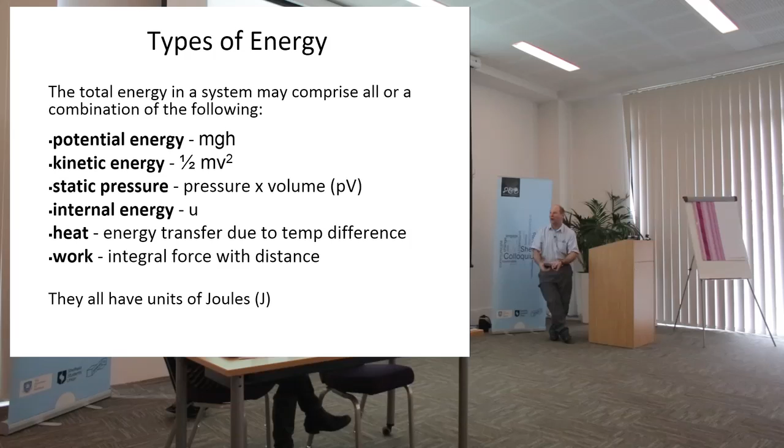But what we get is lots of different types of energy. Has this got a pointer on it? Oh, great. So we get potential energy, energy due to things being lifted up, kinetic energy, the energy associated with something moving. We get pressures around us - to pressurize something requires energy. Internal energy is based on the heat of something, how hot it is. And then we get these other two, which are very necessary for what's going to follow.

Heat is energy transfer due to a temperature difference. So if you've got a hot thing and a colder thing, the energy moves from the hot thing to the colder thing, and that's the heat transfer. You always get heat transfer if you've got a temperature difference between two things. Work is force with distance. So if you've got movement, like I'm doing now, you're doing work. If something's moving, there's work associated with it. Interestingly, electricity, pointing to the light, is also a form of work because you can convert that directly into movement using a motor. So heat is energy transfer due to a temperature difference. Work is energy transfer due to movement.

Remember those. Actually, you don't have to because I've got them written down here. Don't worry too much. Energy transfer is associated with the force acting through a distance, and we've got some units associated with that. Remember, heat, temperature, work, movement.

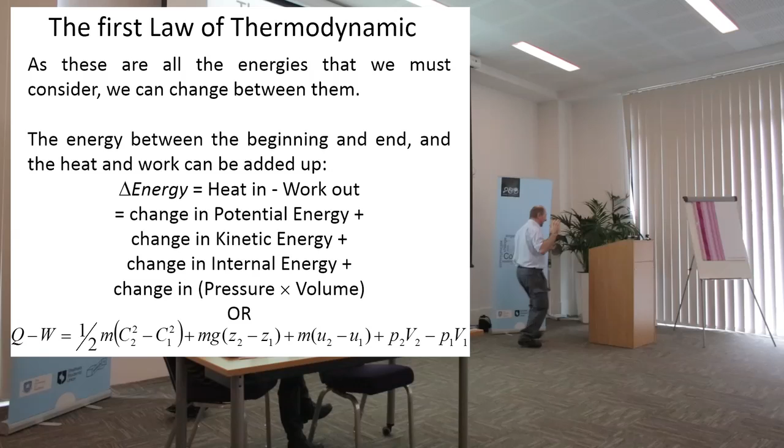We then get the first law of thermodynamics. There are lots of different ways of writing it down. These come from my first year notes. What we can see is that all of the energy terms I gave you before, heat, work, potential energy, kinetic energy, internal energy, pressure times volume, they are all interchangeable. So the first law of thermodynamics tells us that all of these different forms of energy are interchangeable.

So if we heat something up, we might increase the internal energy. They just all balance. There are lots of different ways of looking at that. I was going to play this from YouTube. I know some of you have seen it before.

Okay, that's brilliant. So what we see there, and I'm not showing it for prurient purposes, is actually all about energy transfer, because this brings up lots and lots of interesting things. Are we in pause mode? Probably. So what we get here, bet you didn't think you were going to get some film critique here.

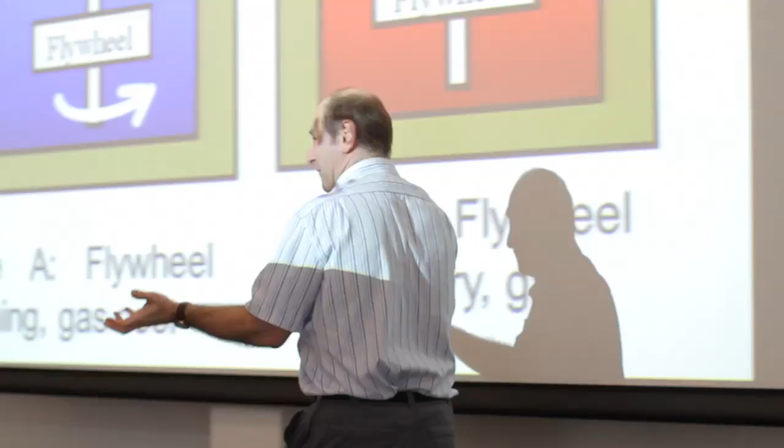So what we find out is that this is due to what we call the second law of thermodynamics. The first law tells us energy can neither be created nor destroyed. The second law tells us what order things happen in.

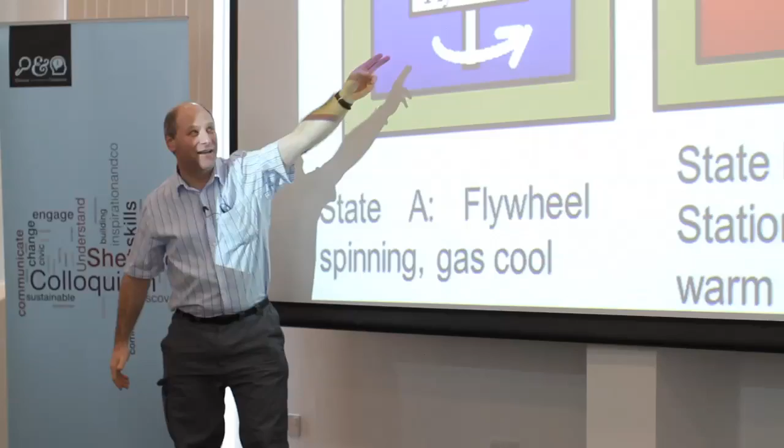A good example of this, once again from my first year notes, is if we have a flywheel spinning in an insulated box, the flywheel possesses kinetic energy. If we leave that for a long time, the flywheel will slow down. It'll convert its kinetic energy into warming the box up. So what we find naturally is that the spinning wheel slows down, that energy goes into warming up the box, and that's the natural way of things happening.

So what happens is the natural way of things is for movement to turn into heat. We see that in exactly the same way from that guy and his cycle riding experience. I have a helmet, so I'm all right. So there's naturally a way for things to go easily. Don't worry, this is going somewhere. So if we look at these, which of these is easier to do?

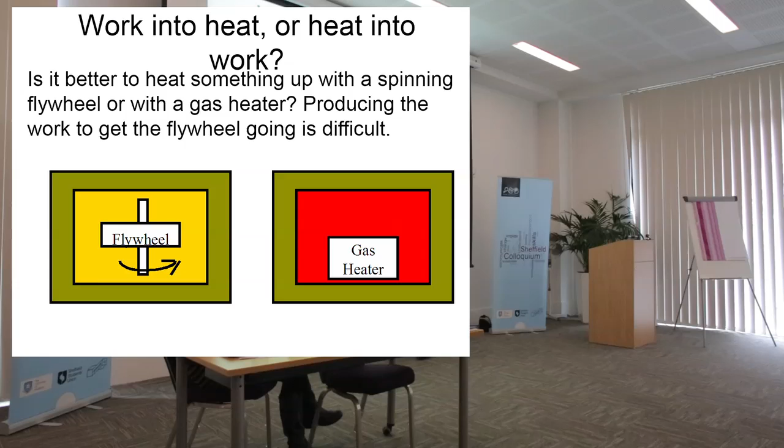To heat our box up, by spinning up a flywheel to speed and letting it slow down, or by putting a gas heater in there? I won't even trouble you to ask for an answer. This is clearly a lot easier, because we'd have to get the flywheel moving, and to actually get things moving like that is difficult. It's hard work, as they say.

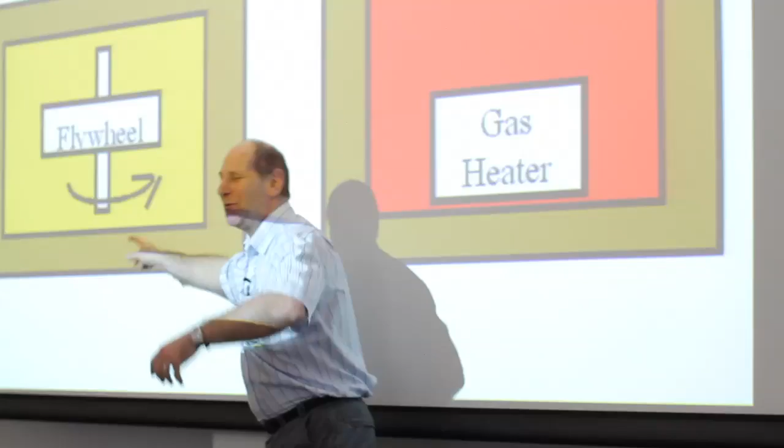So typically how we would get that flywheel moving is we attach it to an electric motor. The electric motor's got to be attached to the electricity. The electricity comes from a power station. We burn some gas in the power station.

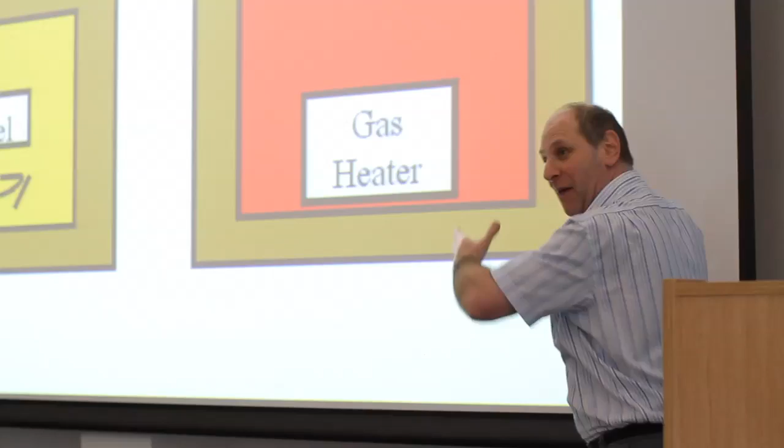Really indirect. So what we find here as well, which comes out of the second law of thermodynamics, is that movement, that work, that potential, is a much more valuable thing than heat. When we looked at that guy coming down on the slope, the amount of energy possessed in all of those pictures was roughly the same. But what happened was it went from the high quality energy at the top to the low quality energy of him giving up his energy at the bottom and dissipating into the world, which is why we can't go easily from here to here. We need big power stations to do them.

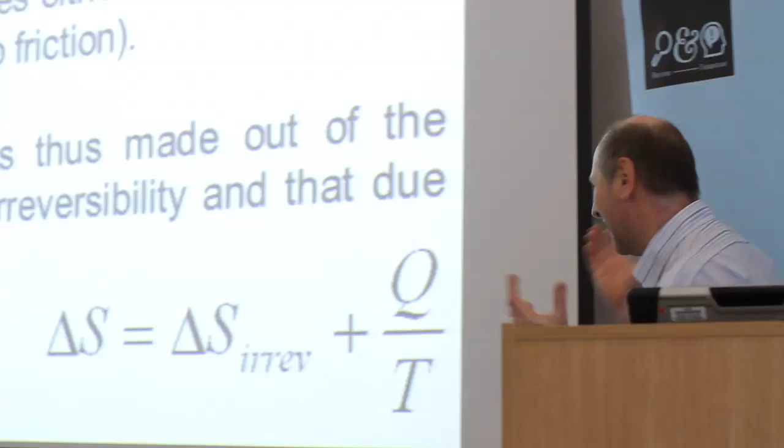I have to put some equations in because otherwise I get fired.

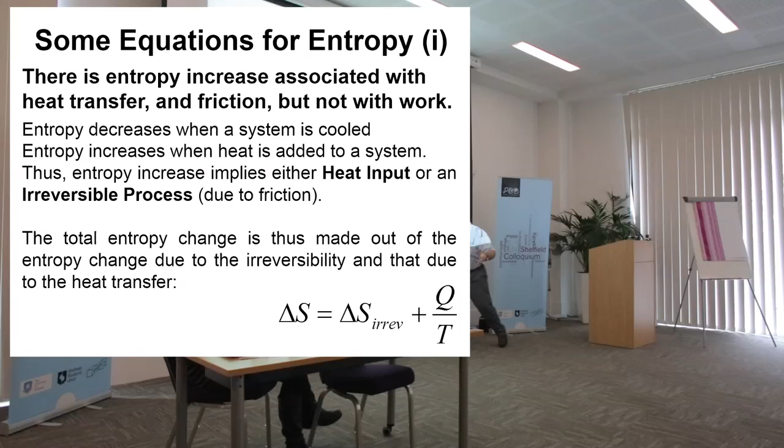Here is one of the two equations for entropy that we've got. This basically tells us that ΔS — S is the symbol for entropy — is equal to something due to the irreversibility, due to friction and things in the system, plus a bit associated with heat transfer, Q.

So what comes out of doing this in further mathematics, which I won't do but I'll show you the results of, is to say that things have a natural way of going. Because of these equations, we're able to say mathematically and physically which way things will go, whether processes are actually viable, whether they can happen, and also how good they are. This will come into what we do later.

Are there any physicists in the house? One? Good, have you come across that? Good, excellent. This is another way of describing the same thing.

There's another way. We've still got S there, entropy. This is the way that Boltzmann defined it. He was so proud of it that he actually got this written on his gravestone. What's entropy? Oh, that's what I'm going to do now. Okay, if you wait a second.

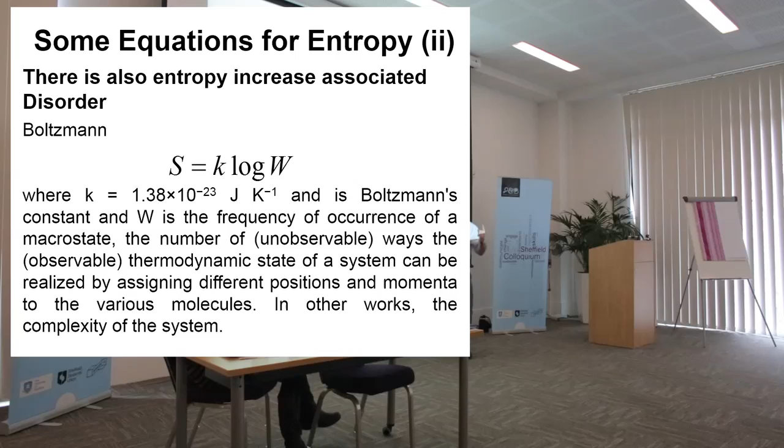Sorry, if you don't understand when I finish this slide, put your hand up again. Good. So what entropy is, in this case, is S equals k, which is a constant, times log W, and W is the number of ways that the system he's looking at can be defined, the number of different states it can be in statistical mechanics.

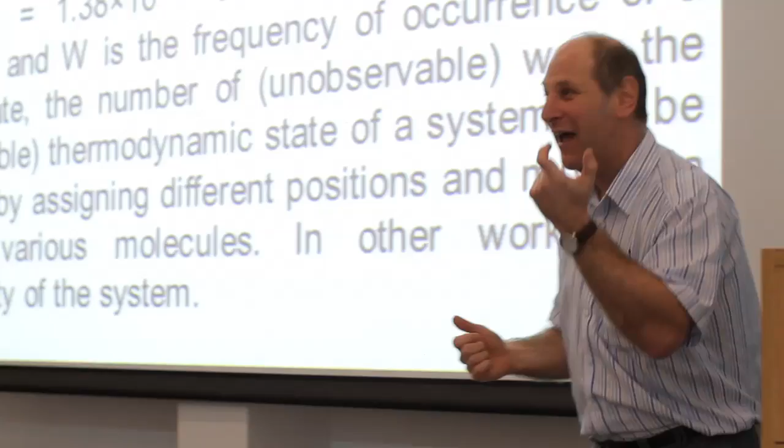And what entropy actually is — well, lots of different ways. That's a really bad question to ask, I could spend about the next 40 hours on it, or somebody could. It's disorder, the amount of disorder in a system. If we think of a pack of playing cards, there's an ordered form, maybe ace to king in the four suits. If we throw that up in the air and gather it together, it'll come down in a disordered state. So if we want to put it back into that ordered state, we have to go through and put work in to sort it out.

Same as my daughter's room. If ever I want to find one of my jumpers, and they're not a very good collection, I look on my daughter's floor, and that's where they are. She's converted my nice, neat jumper drawer into a disordered mess in her room, because the natural order of things is to become disordered.

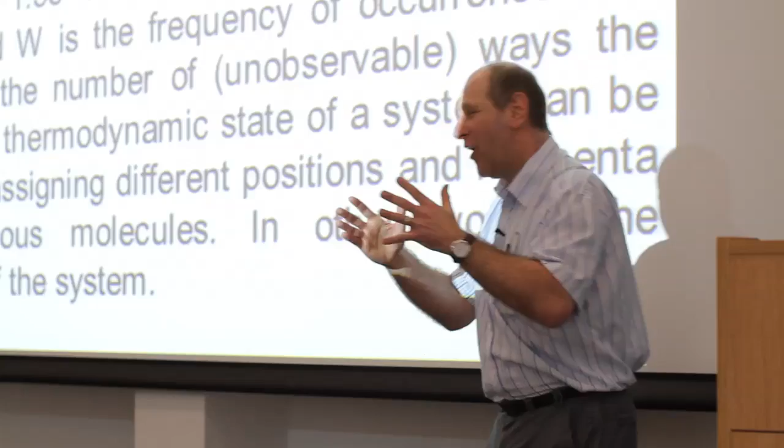So we move from what was at the Big Bang, a highly compressed system of everything where we knew exactly where it is, where entropy and disorder, S, was zero, into what we're getting at the moment, things becoming more and more disordered, further apart, less defined, and stuff like that. So the whole idea of entropy is a very complicated one because it brings in so many things.

You can also, using this same equation, define disorder in information and things like that. Actually moving ones and zeros from one form to another increases the disorder in the world. It's got lots of different possibilities, which is why there are these different forms of it. But if we think about it in terms of disorder — something being lost, because energy can't be lost when we move from one form to another, what can be lost is the high quality of the energy. So the really high quality of the energy, like at the Big Bang when it was all a little thing about that size, was very high. As it gets spread out, it gets dispersed more and more.

Because we can put numbers to it, we can define which way things go forward and which way they go backwards. I know it's not a magnificent description, but it's really complicated. Things get naturally more disordered, and we have to put in effort to reorder them. That's this form of it. When we get on to the playing cards, whatever order they come up in could be the order you wanted them to come up in. It's like the lottery. So that's what our different states, log W, refers to there - the different ways that things can be reordered. And we have defined one of them as being the correct state.

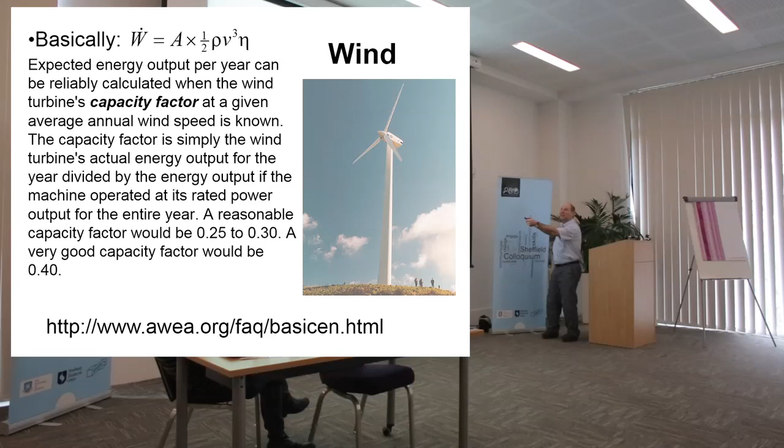I've got an equation there because, once again, I feel I need to put some equations in. W dot's the work term there. That's the area of the wind turbine, swept area, density of air, and that V there, cubed, is the velocity of the wind coming towards it. So it's got a V cubed term on there. So if we double the speed of the wind coming towards it, the power output goes up, roughly speaking, by a factor of 8. So if you put these in a place with a big wind, you get a lot more power out than if you put them in a place with slightly less wind. So nominally a really good idea.

Let's see what it means. I like this, my favourite politician at the moment - no, he's not. So when he first moved into power, David Cameron said he was going to stick one of these up on his house. Does anyone remember that? Probably not, you were too young. It's a B&Q Windsave wind turbine system, 1,500 quid to you.

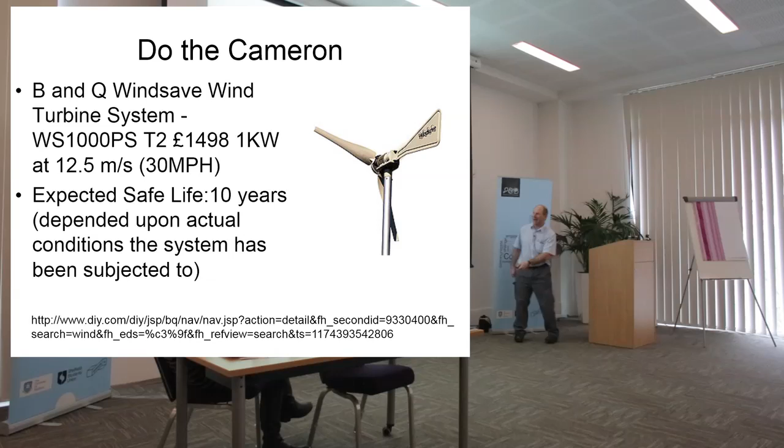Meant to give a kilowatt at 12.5 metres per second - that's 30 miles an hour. It's unlikely your roof will stand up in that. So that's the first thing - complete over-description of how good it is. Expected safe life, 10 years. First of all, it'll knock his house apart. Secondly, financial benefits of these things.

It's on a slightly different one, but that's it. This guy wrote about it - it wouldn't pay for itself in the 56 years that they said it was going to. It would take several millennia to pay itself back. So you could buy one of these things with an expected life of 10 years, which takes several millennia to pay itself back. So someone hasn't done the calculations.

Actually, the Windsave ones that David Cameron was looking at buying - if you put one up in a town, as opposed to in open countryside, the electronics to run the converters use more energy in a year than the wind turbine produced. So your very best trick with one of those to save the planet was to unplug it.

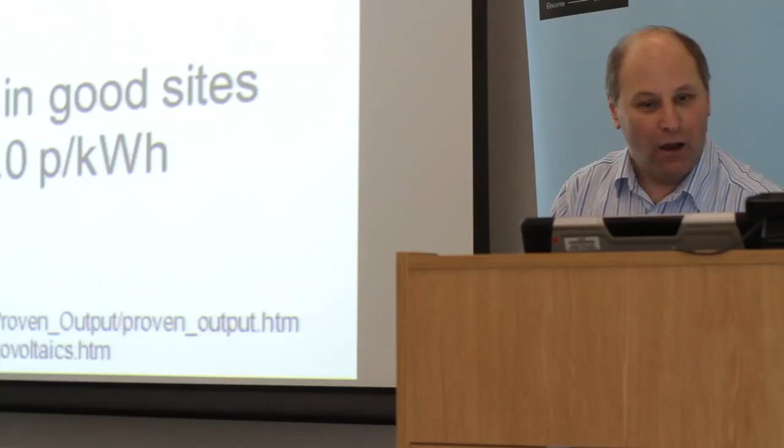So once again, that was sized at 12.5 metres a second, which is right off my scale here. This is a 9 kilowatt proven, a 6 kilowatt Proven - this is a bigger wind turbine. Those are 1 kilowatt; this is about 6. It's a much better thing. As the scale goes up, the value gets much, much better. Those huge ones, like I showed at the beginning, they're really pretty good.

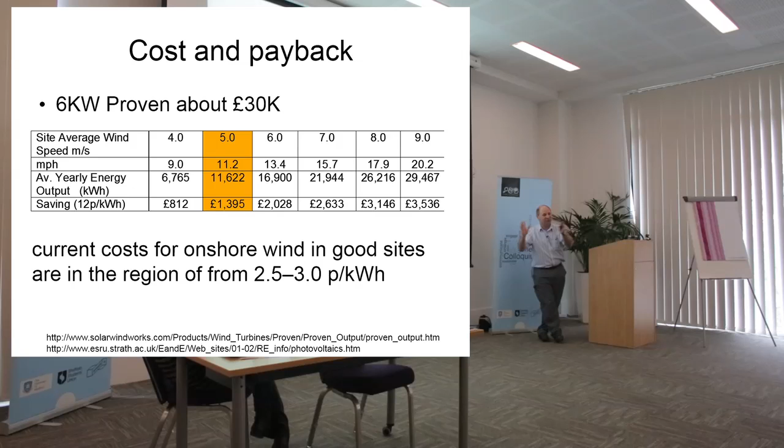Sometime over the summer, 10% of Britain's energy resources were produced from renewable purposes, but very little of them came from wind. The thing we can see is that you get a payback period of maybe, with typical wind speeds of about 5 metres per second, about 25 years. So that's about the smallest size that's worth putting up. Notice 12.5 metres per second doesn't even occur on my notes there.

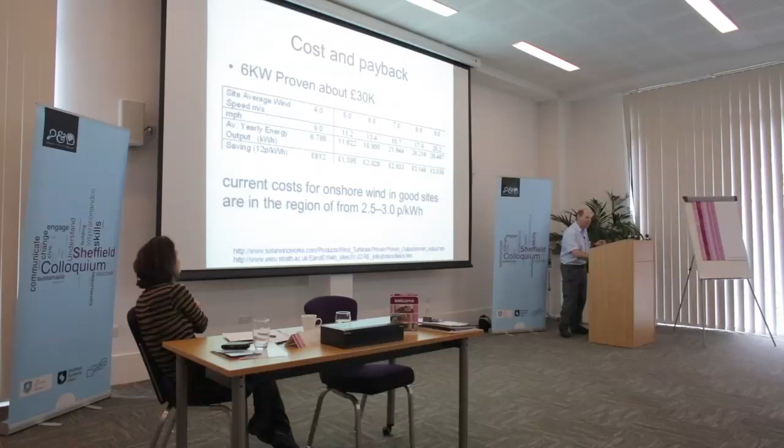So once again, think about what you're doing. Look at the numbers, decide what's going on. Don't just think that a wind turbine's a good thing to put up and therefore you want to do it. You've got to look at where you're putting them up, what the size of them is, what the efficiency is, what the upkeep is, what the utilization factor is, and all these different things for putting them up. You mustn't just think, I want one of those, I'm going to get one, it's good for me, it's good for the planet. The only person that was good for was B&Q, and not even that in the long run. So there we are - payback period about 25 years.

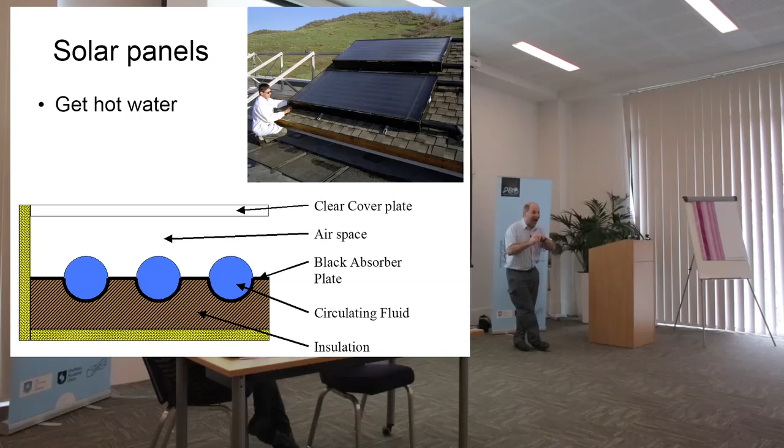As a Guardian reader, hence my thoughts on David Cameron, there was an article on Saturday saying there was an Australian study which found people started feeling ill when wind turbines were put up in their area. The reason they felt ill is because people told them they would be feeling ill. So some of the perception of these things is actually what people are being told to believe.

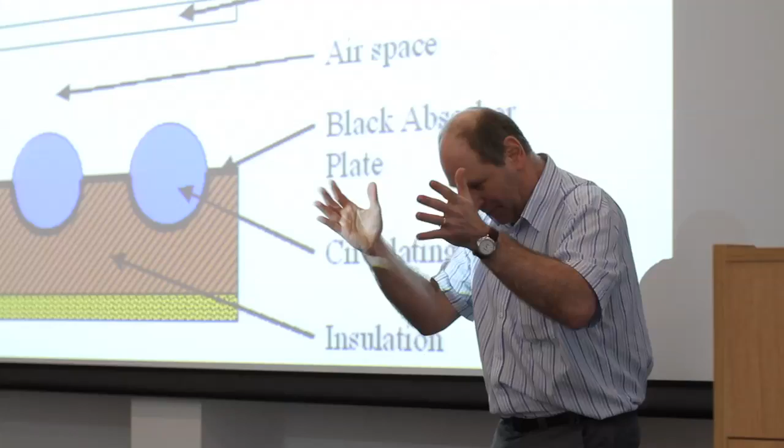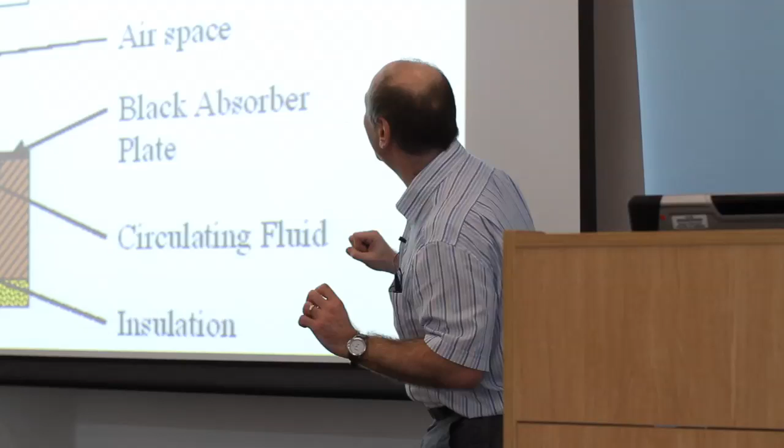There was another thing on the BBC website about what the papers said on Sunday morning, and a piece from the Daily Mail saying global warming is always wrong. This is one of the things the Daily Mail disapproves of, so they find all the information they can and have it corroborated by great luminaries of the renewable energy and climate change world, like Lord Lawson. They've actually built a complete little industry around it.

Solar panels should be a really good idea, and I do think they're a very good idea since I've got a PhD student doing a project on them at the moment. But they may not be a good idea this far north in this country. I've also got a large contract from a company who builds them, so I should be careful what I say here. So solar panels, not to be confused with solar PV, produce hot water.

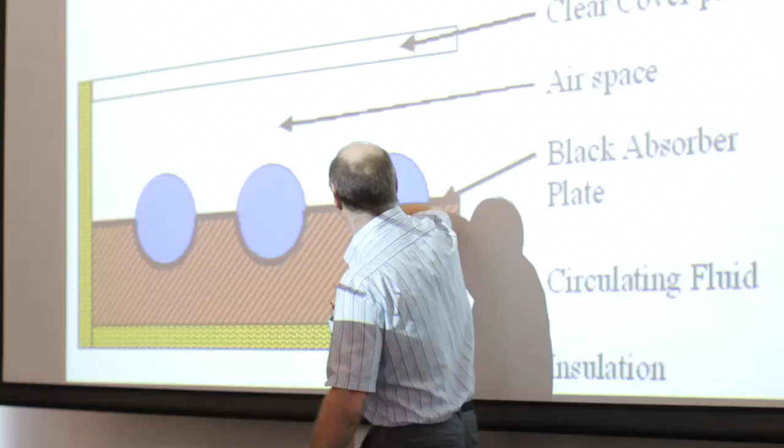Yeah, hot water. The sun comes through, hits the black plate, heats up the area between the cover plate and the other bit. That's hot, so the water circulating around heats up and takes the heat away. Nice and simple, very few moving parts, and you can build them very cheaply.

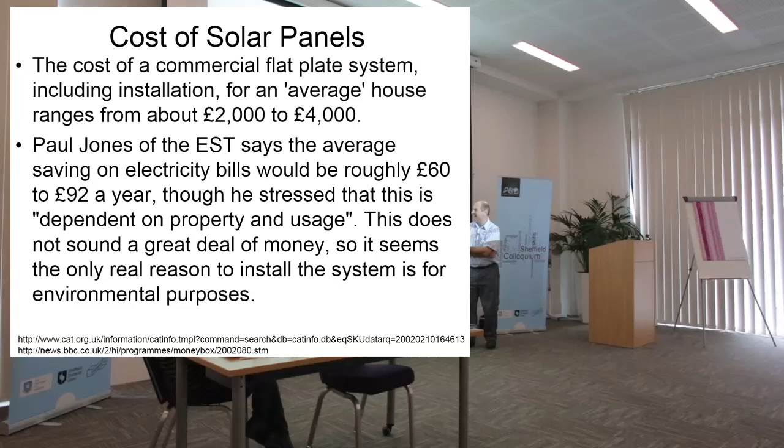They're brilliant until the moment you try to do the calculation. Costs £2,000 to £4,000, and the price hasn't dropped that much. You can get savings in this country of about £92, which gives a payback period of, well, forever. Someone even says this doesn't sound like a great deal of money, so it seems the only reason to install the system is for environmental purposes — God knows what that means, because it's clearly not going to be very good for the environment.

As you move to different parts of the world and the scales go up, all of these equations start changing. In Spain there's a huge solar-powered site covering several acres, with lots of little mirrors beaming the sun toward a tower where they run a conventional power station. These are really a good thing to do there — it's sunnier, warmer, and they've got a lot of unused flat land.

So once again, don't take what I'm saying as 'don't do these things.' All I'm saying is look at the numbers, see what they mean, and then decide whether you're making the right decision — because clearly it's going to take energy to build these devices, these solar panels and things like that, and that energy is stuff we want to get back.

Roughly speaking — I've never seen it written down properly, but it's something I sort of believe, which probably isn't a good place to argue from — if something doesn't pay back in financial terms, it doesn't pay back in energy terms either. So if this has a payback period of 20 to 40 years in terms of money, it may also have a payback period of 20 to 40 years in terms of energy. So you may never get the energy back that you're trying to save.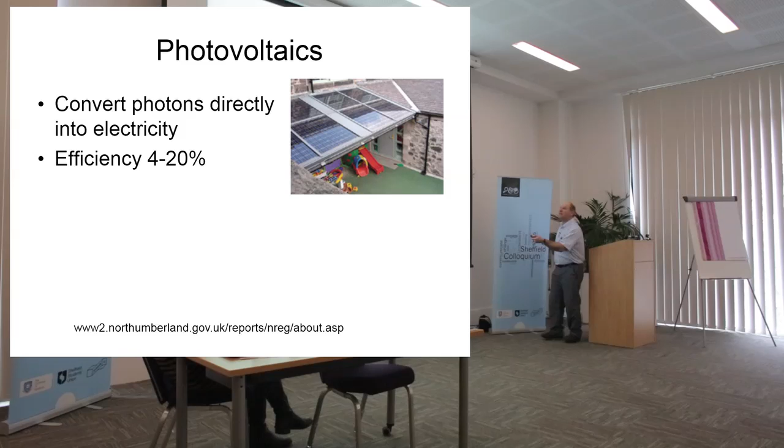Photovoltaics, here's one. When you've got your photovoltaics, they're these things people are beginning to put up on their house. Notice they're shiny, the other ones are dark because they have to absorb energy. These are slightly different. These directly convert the photons from the sun into electricity. Photons are little packets of energy, already in the form of work. So what we should be able to do is just trap these and convert them into electricity because they're already electromagnetic radiation. The efficiency of conversion is somewhere between 4 and 20%.

Feed-in tariff. The government, in its wisdom - I use that word in its broadest sense - decided they'd like to get this business, photovoltaics, renewable energy, going as a business. When they first put them in, they set it at 46p per kilowatt hour, and it turned into a scam. Because interest rates were so low, once they were up and running properly you'd get something like a 12% return on investment, at a time when your ISAs were getting about 2%. People were doing all sorts of things just to invest their money in these, because you'd get 46p per kilowatt hour for the next 25 years on the ones you put in. It was busy turning into a scam. And the money to pay for this comes from you and me, because the cost of these was tacked onto people's electricity bills, and we're all paying for people to get a return on investment of about 12%.

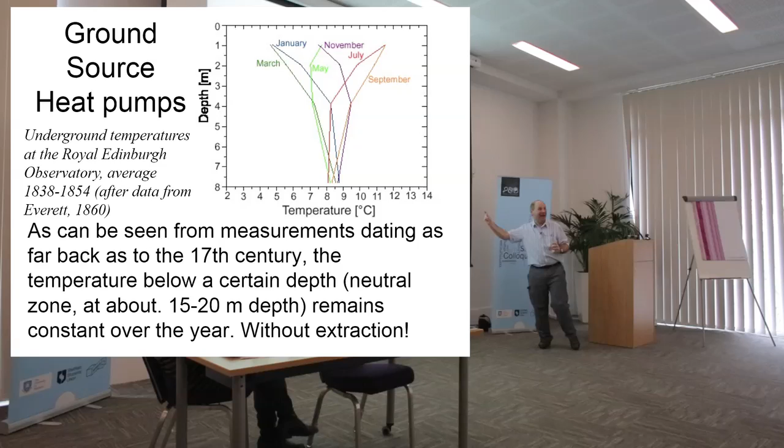Yes, but hopefully the price of these will carry on dropping, and there comes a point - let me see if I can actually go up at all - there comes a point where they become viable. We're hoping that the cost of energy going up, and the cost of these coming down, will cross. What we're trying to do at the moment is invest here for an energy cost of the future. In the same way that when we bought our first compact fluorescent light bulb, it cost about £10 about 15 years ago, and you can now get them for about 99p. If you wait, and the industry doesn't collapse, which it's not very likely to, the cost of these things will drop so much that anything you put in now has gone past its sell-by date and its efficiency date by the time you get to a crunch point. So what we have to hope is that the technology gets good enough.

What I'm saying at the moment is, the only reason anyone would want to put these things on their roof is for the government grant. Therefore, we have to think about what we're actually doing for the environment with these. Because once again, if it's going to cost that much to buy, with that long a payback period, they may not last that long.

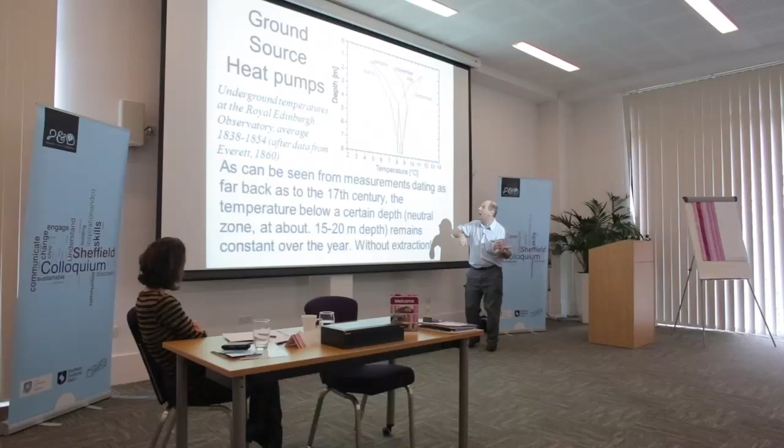What we find is if we dig down into the earth, the temperature becomes more and more constant, at about, as it says there for Glasgow and Edinburgh, about 9 or 10 degrees. So once you get down deep enough, it's about 9 or 10 degrees, which is warmer than the outside temperature in, say, winter. So there must be some way of using that heat, that extra warmth, to help out with our energy, to heat our houses. It's not really warm enough to heat your house, though my office has on various occasions been down to about 8 degrees.

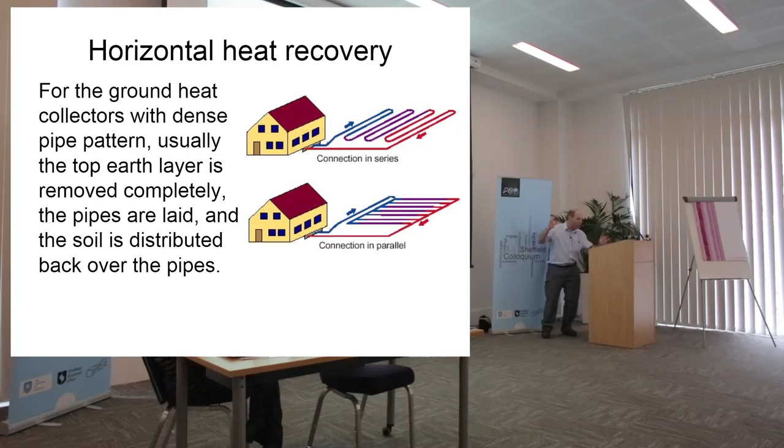What we can do is get that heat by passing water, which is colder than it, through some coils - remember, heat goes from hot place to cold place - which could be in the earth, either horizontally, so it warms up, or possibly vertically, deep down into the earth. So we put the colder water, colder than our 8 degrees, and it comes back warmer than we put it down. So we've gained heat in doing so.

But once again, my office isn't very good at 8 degrees, and neither is heating your house at 8 degrees. So we have to use what we're able to extract as energy in a form which will let us heat things up. And for that we use a bit of technology - here are a few pictures.

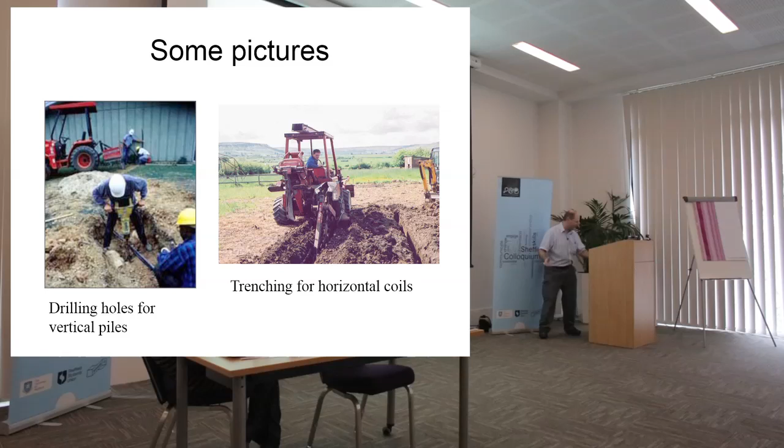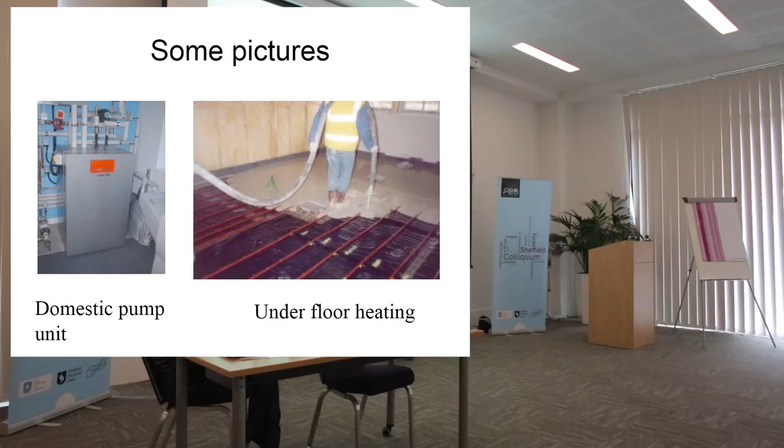There we are, drilling holes, trenching for the coils. This is not a picture from the Somme, it's actually some coils ready to go in. We heat them, we get that sort of low-grade heat at around 6, 7 degrees, and turn it into something we can heat our house with, using basically a refrigerator. I'll cover this in a few seconds.

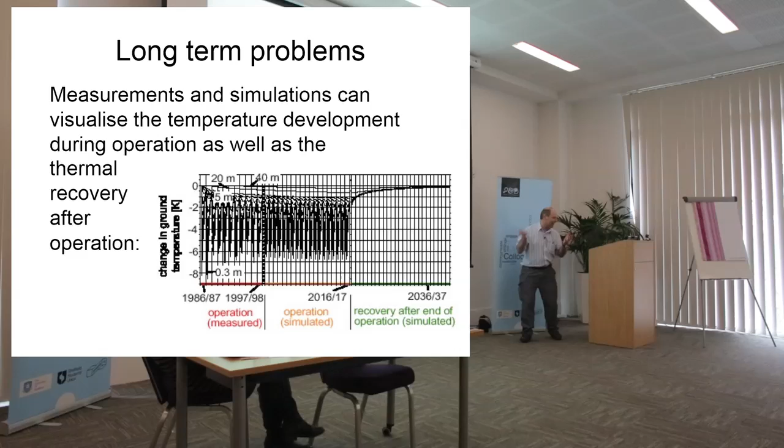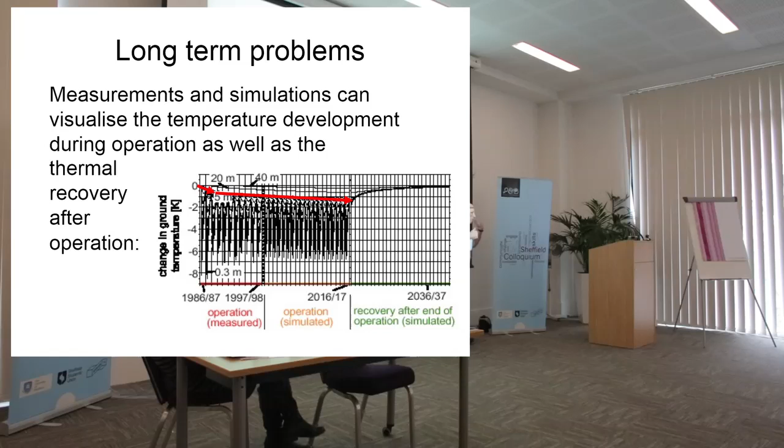Quite often we use things like underfloor heating, which has got a very large area, and therefore we can get away with less actual temperature. As we'll discover, temperature is one of the killers. The other absolute killer is that if you keep taking energy out of the ground, it cools down, and once it starts getting below freezing, the heat transfer rate drops enormously, and you actually have to leave it to warm up. You can get around this by running them in reverse in summer to use them for cooling the place, but then you're paying money for cooling, which is not necessarily a good idea.

Good - as I said, I like numbers, I like thermodynamics. And what we've got here is a heat pump. A heat pump is a refrigerator when we think about the other side of it.

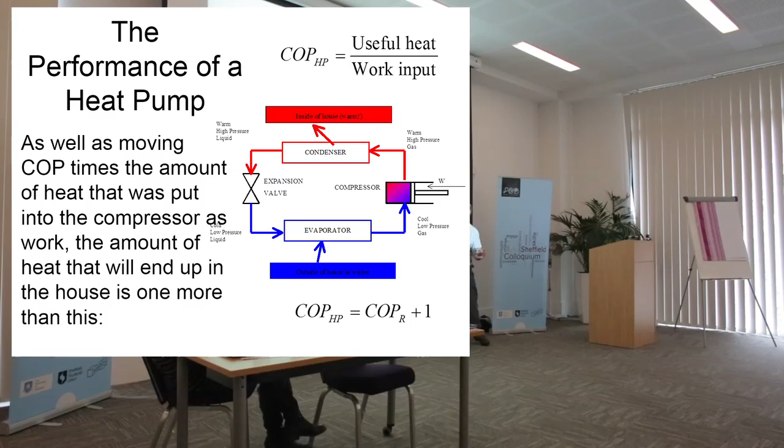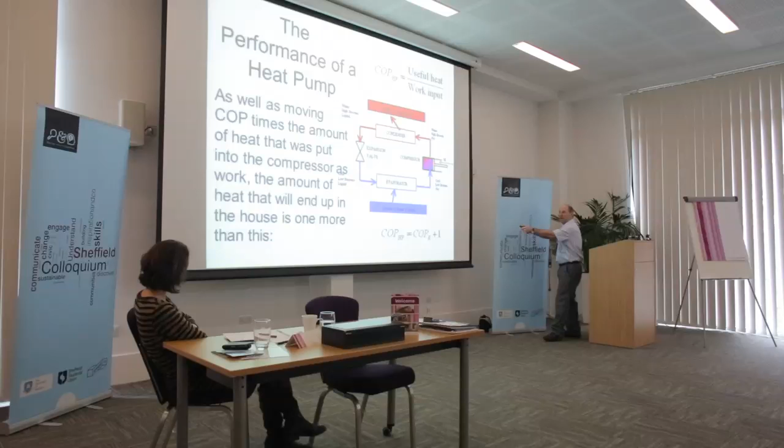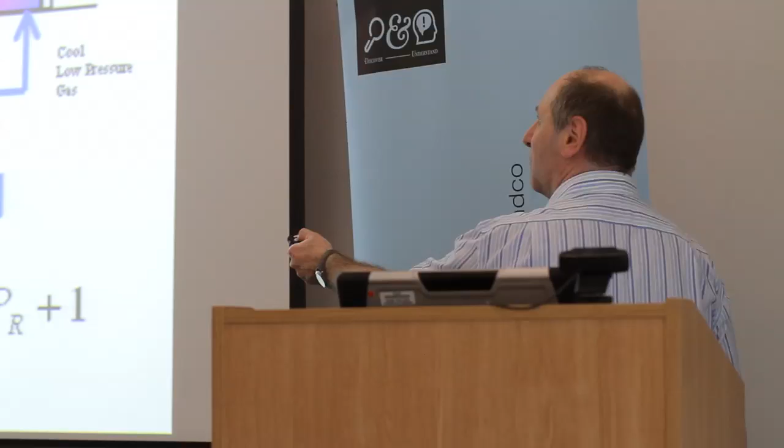When we think about our refrigerators, there's a cold bit inside your fridge, and there's a warm bit, usually covered in dust, at the back of your refrigerator that hums. What happens is the cold bit is colder than the inside of your refrigerator, and the hot bit is hotter than your kitchen, and therefore you can move heat from inside your refrigerator into your kitchen. You do that with a pump - we're putting work into the pump in order to move heat from a cold place to a hot place. This doesn't break any of the laws of thermodynamics because we're moving heat from a cold place to a hot place, and we're putting in work to do that.

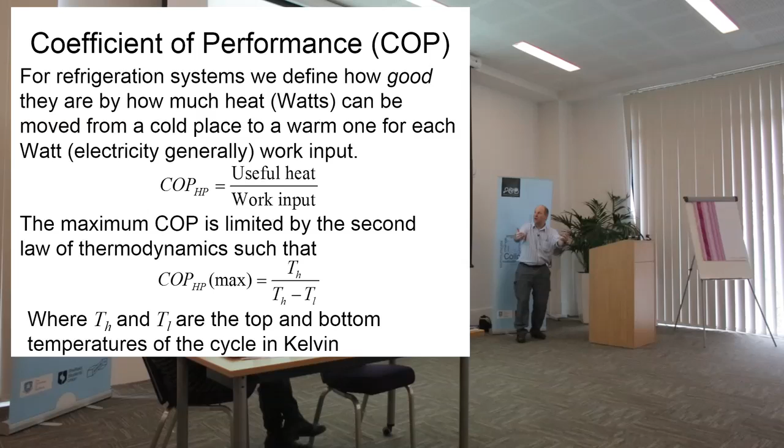What we find is that we can define how good these are. We use this term here, coefficient of performance, which is the useful heat divided by the work input. This is the amount of heat that we move for every bit of work we input. Ideally we want that number to be as high as possible, so we can move as much heat as possible with as little work as possible, which is in effect the efficiency.

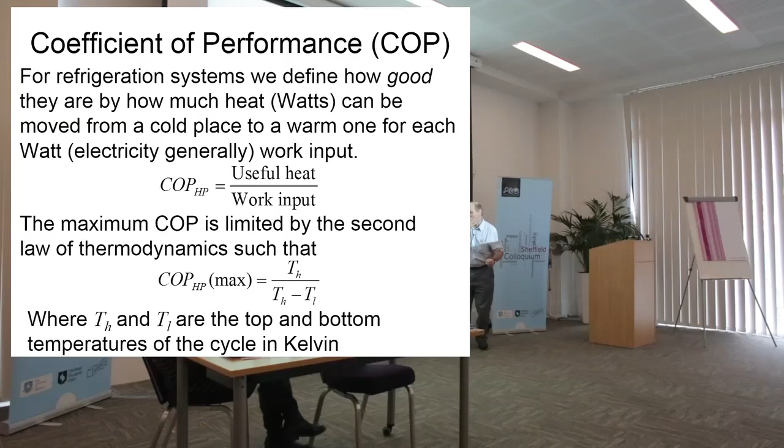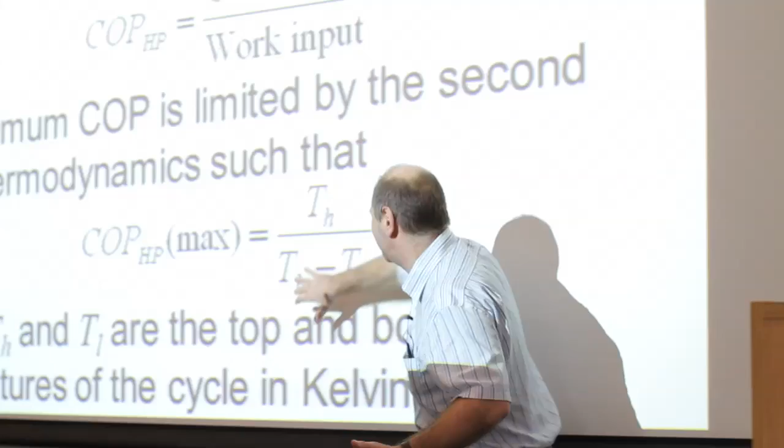Unfortunately, the second law of thermodynamics comes in to limit that maximum coefficient of performance. These are temperatures in degrees Kelvin. What this shows is that as the difference between the high temperature and low temperature gets bigger, the coefficient of performance drops. So we can move the most heat for the minimum amount of work if we're doing it over a very small temperature difference.

Don't forget, people are selling these things. What we actually find is that our coefficient of performance, depending on what we want to do with them, drops lower and lower.

If we've got underfloor and hot air heating, which is about 35 degrees - if your hot air heating is any more than 35 degrees you end up with what we call a fan oven burning people - you get a coefficient of performance of about 4 through that. So for each bit of work you put in, you get 4 times as much heat moved. Sounds pretty good. If you start using radiators, you might go to 45 degrees, it drops to 3. Hot water is about 2.5. That still sounds pretty good, because we can get 2.5 times as much heat moved as the work we put in.

Unfortunately, things get even worse.

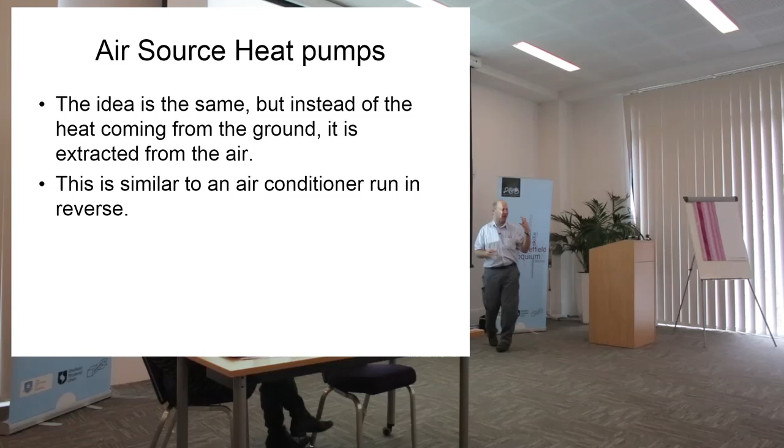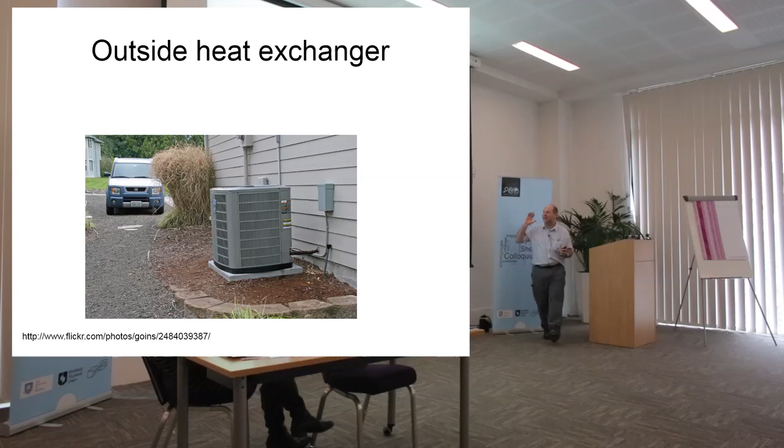As I showed, if you want to put in a ground source heat pump, you have to either dig some very deep holes or dig up your garden or something like that. So an easier thing for builders to put in, so they can claim their green credentials - don't forget you can get green grants on this sort of stuff - is the air source heat pump. An air source heat pump is exactly the same as a ground source heat pump, except instead of digging up your garden, you put one of these in your drive.

What happens is this provides the heat. You put a fluid into this which is colder than the outside, therefore heat goes from the outside to the inside. We use our heat pump in the same way to raise it to a higher quality of energy. And that's how it works.

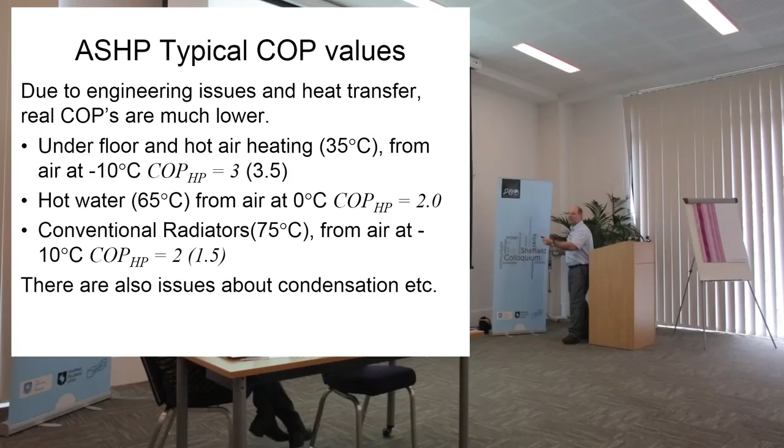So it's quite compact, we don't dig anything up, but unfortunately it is spectacularly poor. When I put in these numbers in the brackets - it should be 2.5 - what you find, as I said, is the closer together the temperatures you're trying to pump between the inside and the outside, the more heat you can move.

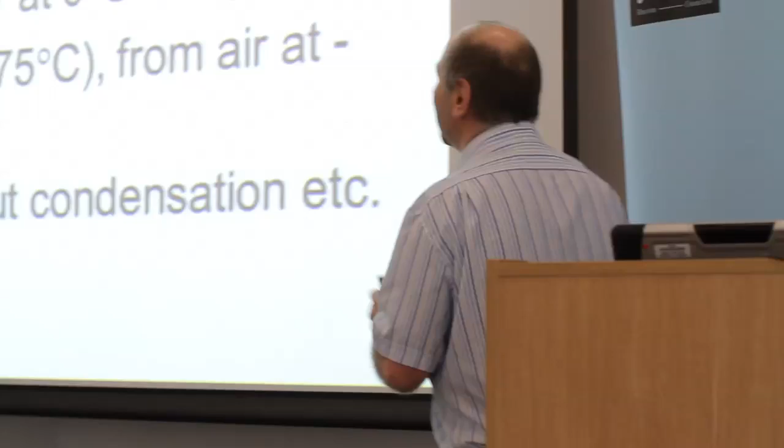That means on a cold day, the temperature difference is bigger. And on a cold day, you want more energy out of it. So if we've got a really cold day - it went down to about minus 10 at our house a couple of years ago - and we've got underfloor heating, you might get about 3 times as much moved.

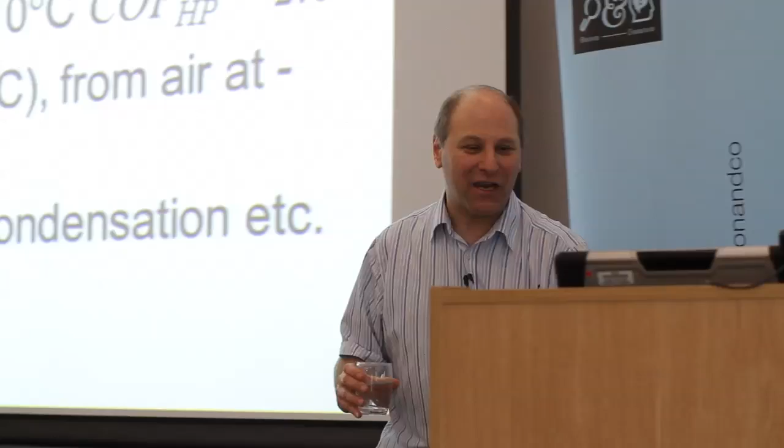If you want to move hot water, twice as much. If you're going to use a conventional radiator, which the British standard says you want to put your energy in at 75 degrees, you're down to a factor of 2 or even 1.5. So on the cold day, when you want it to work well, it's working very badly. There are also issues about condensation and problems like that.

Already not very good. But the problem is, and I'm surprised nobody's picked me up on this yet, is the fact that what we're doing is pumping the heat from a cold place to a hot place using work, and work usually in the form of electricity. And where do we get the electricity from conventionally?

Burning stuff - coal, gas, whatever. And if we burn things, we get held up once again by the second law of thermodynamics, that damn second law of thermodynamics. What we find here is that there's a maximum efficiency with which we can convert heat, from burning stuff, into work, which is electricity.

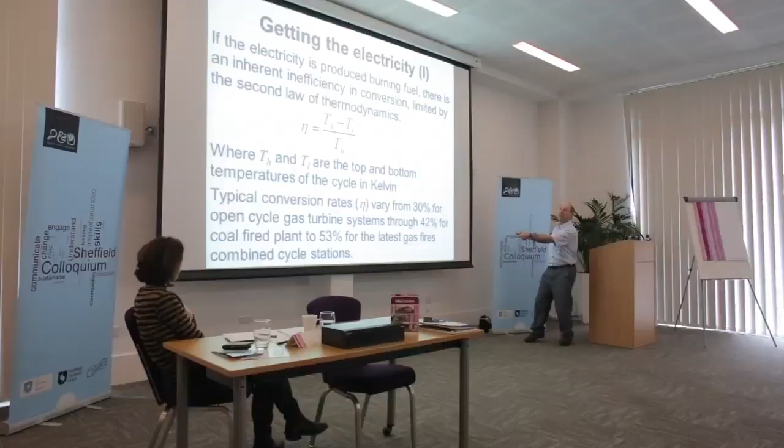That's related in exactly the same way - actually, this is about the reciprocal of the previous equation, I went one over it. So the higher the temperature difference we have between our hot bit and our cold bit, the greater the efficiency of our system. So we want our hot bit to be as hot as possible, and our cold bit in our power production system to be as cold as possible.

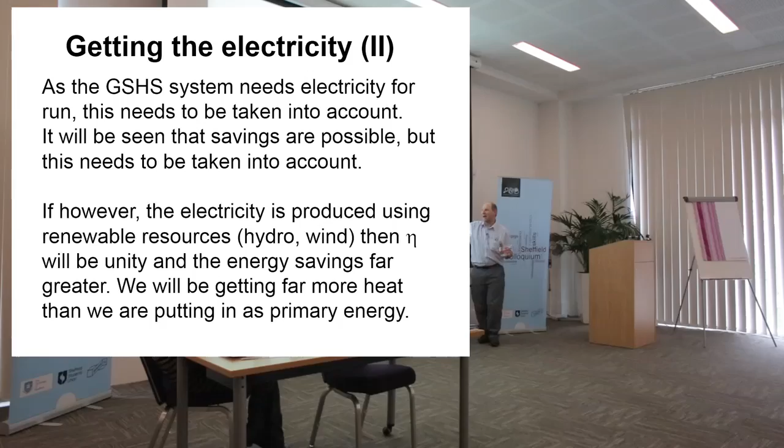So what we can do is make some easy calculations. Bear in mind that if you're going to use electricity in any case, so if you were going to use electric heaters, storage heaters or something like that, your efficiency of power production will be 1. Then your ground source heat pump will be a very good thing because you are actually increasing the amount of heat you get from each bit of electricity you would have used.

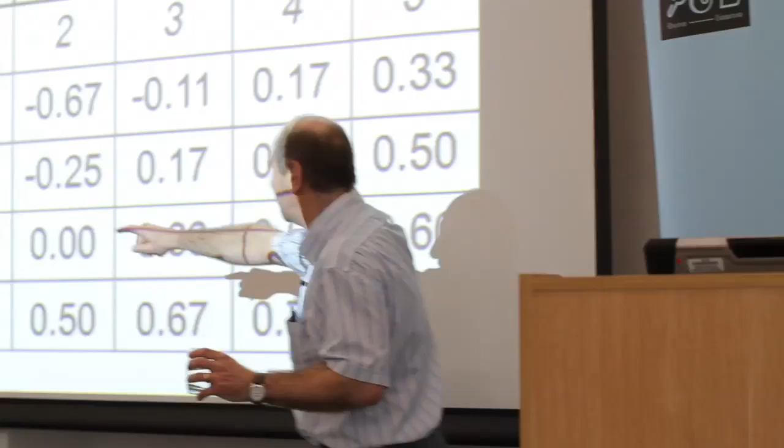So here's a little table I've knocked up. We typically produce electricity from power stations in this country at about 40%. So we can see that if our coefficient of performance is 3, which isn't a particularly great day, we're saving about 1/6 of our energy. And if it's a cold day outside, it's actually costing us more in total primary energy use to run our ground source or air source heat pump than it would be if we just used light bulbs or something like that to heat our things up.

So you can get grants from the government or the Green Energy Scheme to put in ground source and air source heat pumps, but they're not necessarily a good thing. What I'm pointing out is that if you sit down and do some calculations, you might discover it's a really good thing to put in financially because of all these grants and things you get. But actually from the point of view of energy, there are some negative numbers around it. You're actually doing the world more harm by putting in some renewable energy features.

Good. Doing just about all right for time.

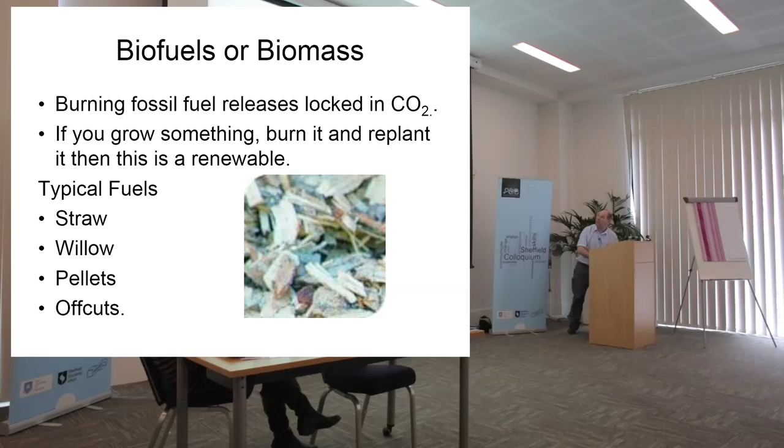The other one which people are very keen on at the moment is biofuels and biomass. You can burn straw, willow pellets, off-cuts of wood. I think they burned cows at one point. So you can get yourself a biomass boiler like this where you feed pellets in and it heats your house up. That's brilliant, renewable resource, wood, great stuff.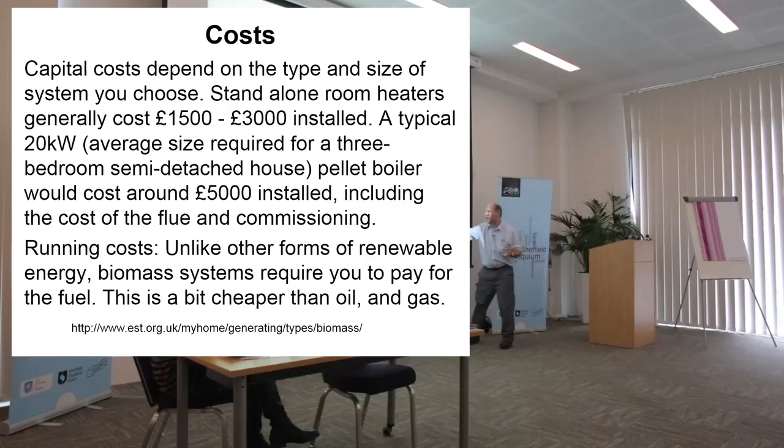There are some problems involved. First of all, they're expensive, about £5,000 compared to about £2,000 for a standard boiler, and you have to buy fuel. Because of the way things are set up, the people who sell fuel price it only just lower than the equivalent price of oil and gas. If oil and gas goes up, the biofuel goes up as well at the same rate. This was from the BBC website about a week ago.

So once again, to get these biofuels, you have to get them from somewhere. Quite a lot of them come from people chopping down rainforests to plant palm oil. They start land grabs, increase global food prices. When the Americans some time ago went for a biofuel thing, they started importing corn oil from Mexico, and that affected tortillas, putting tortillas out of the affordability of a lot of Mexican peasants and things like that. So the Americans, trying to do what they thought would be the right thing to encourage renewable energy and biofuels, actually caused people to starve.

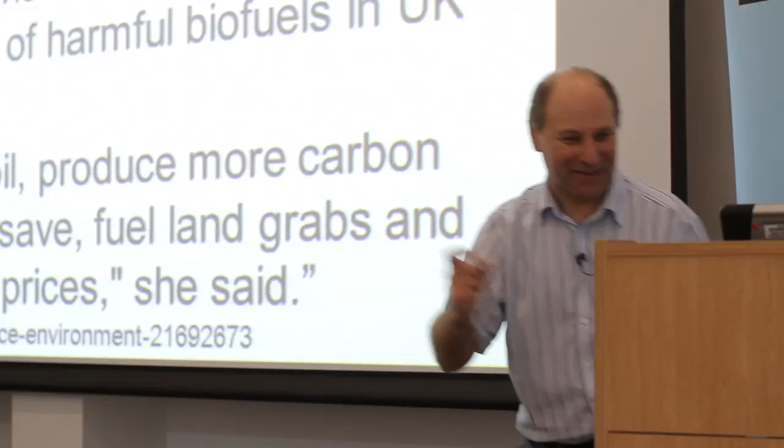I think they stopped that after a while. But these are things of unthought of consequences. Before you do something like say, let's use 10% biofuels and other things, actually think about what the ramifications are going to be.

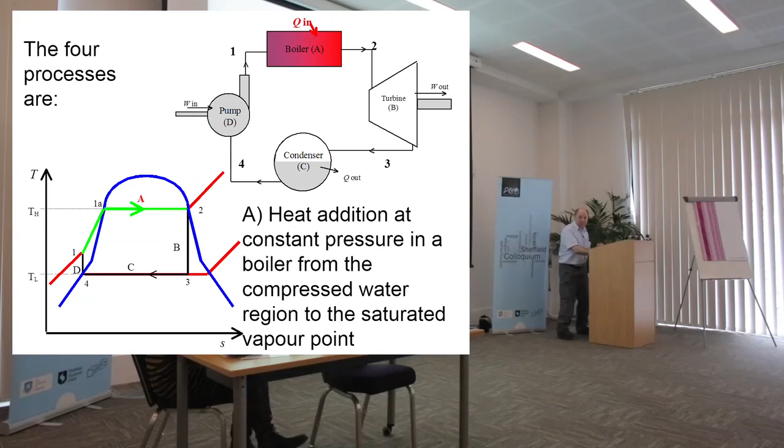This leads on to the next bit: don't get too carried away with it. As a thermodynamicist, the Rankine cycle is the most common way in the world of producing electricity. Don't worry too much about anything here. I can see some horrified faces. My kids didn't like this either. Well, maybe when they're older they will.

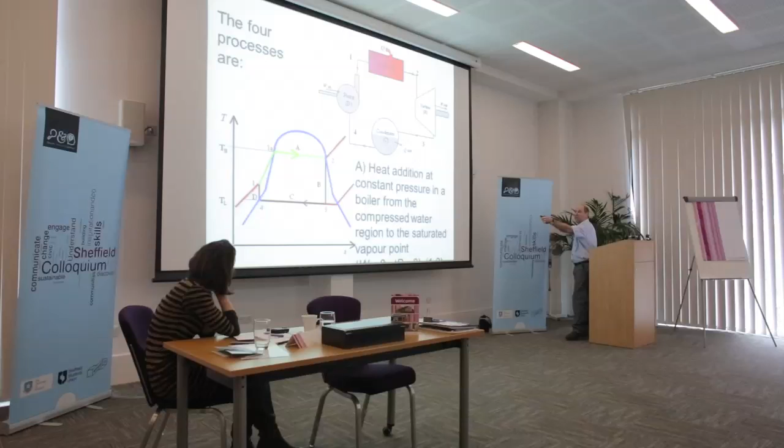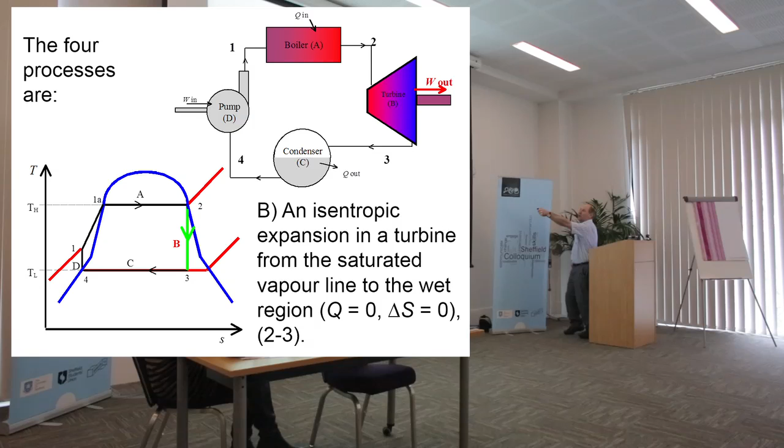So there we go. What you do is you burn your fuel. That can be anything, as I said, straw, coal. The early nuclear power plants also used this to produce the stuff. So you get high pressure, high temperature water there. You stick it through a turbine. The turbine takes that high pressure, high temperature water or steam, extracts energy out of it in the form of rotation. So put a generator on there and produce electricity.

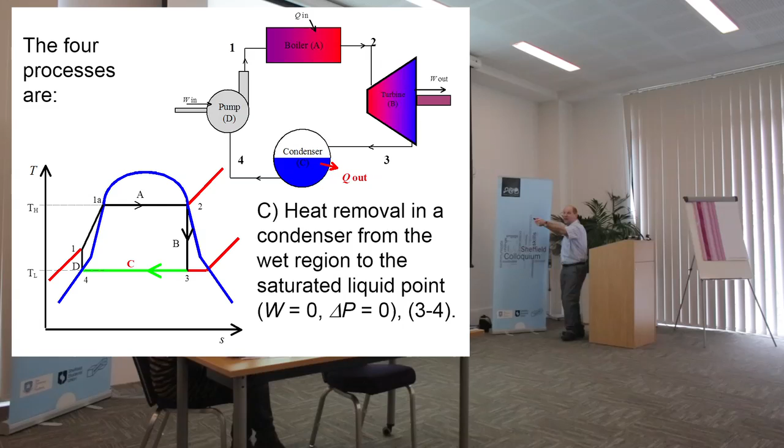Then comes the bit which is probably most important for the moment, which is the condenser. In order to run this as a cycle, you have to get the steam back into a high temperature condition. So to run the turbine between a high pressure and low pressure, you've got to have a low pressure here. So you need a condenser to cool it down and drop its pressure. Then you pressurize it back up, add temperature to it, and you go round and round. But this bit here is unfortunately a required bit of the cycle.

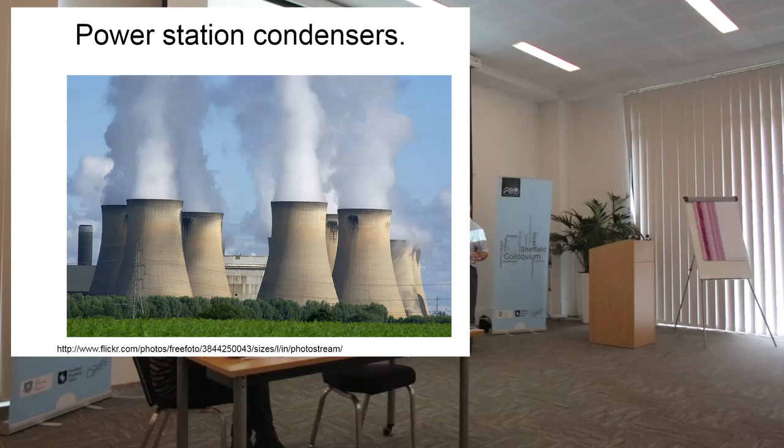So when you go around any power station, as I'm sure you do in your spare time, you find these things. These are about 60 to 100 meters tall. These are the condensers. Inside, they pump the water up to the top and spray it in there. At the bottom, air is drawn up, so these work like a chimney, taking heat out of the sprayed water and making it condense down at the bottom.

What comes out of the top is just pure steam, it's not polluting or anything like that. But this is a required bit, and once again, the second law of thermodynamics tells us that we have to throw away some of the energy that we burn in order to produce work. As I said at the beginning, it's very easy for us to turn work into heat, but much harder to turn heat into work.

If we want to turn heat into work, we need these big systems, and we have to throw away a proportion of the energy. Something like 60% of the energy that we burn gets thrown away in those. So what we can do... let me come back to this.

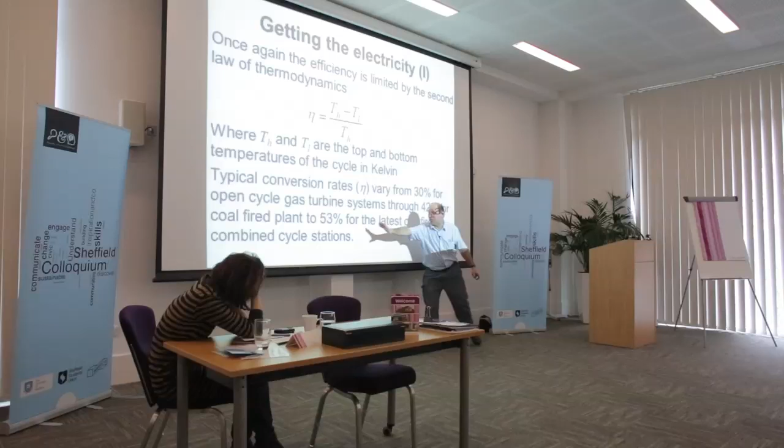What we can do is use that heat. Here's the equation once again, which we've seen before, which tells us that our maximum efficiency is stipulated by the temperature of our boiler and the temperature that our condensers are working at. This is typically about 60-70% for the best systems, but for cheap gas turbine cycles they're about 30%. Most of our power plants are about 42%. The latest gas-fired ones are about 53%. Nuclear power stations are about 28%.

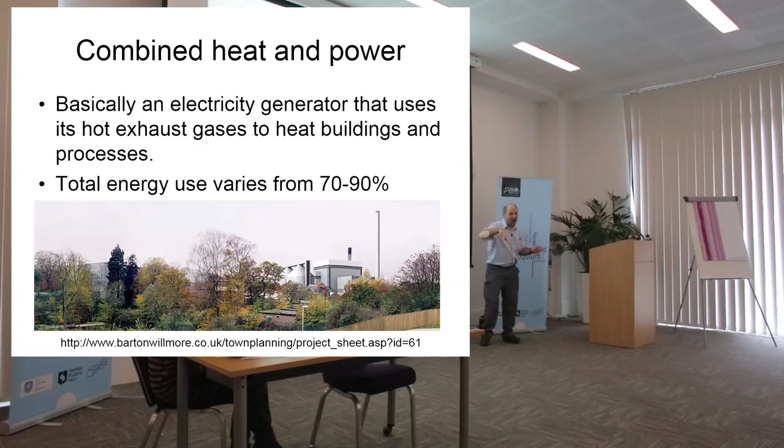So instead of throwing that heat away in a condenser and out to the outside world, we can actually trap that heat, which can be at a usable temperature, and pump it round buildings. The university itself, Pond's Forge, and the city council buildings are all heated based on this sort of system.

The stuff that you throw into your bin every week ends up going through the Bernard Road incinerator, where they burn it. In the old days, they used to burn it and let the heat go up the top and get wasted. Jim Swithenbank, a professor in chemical engineering, convinced them to put heat exchangers up the side of it. Now they trap that heat and pump it round all those buildings. So the heating we get is from stuff that would otherwise get wasted.

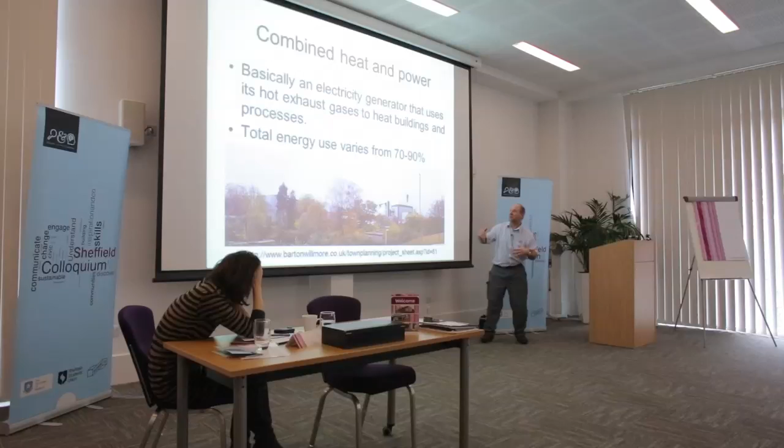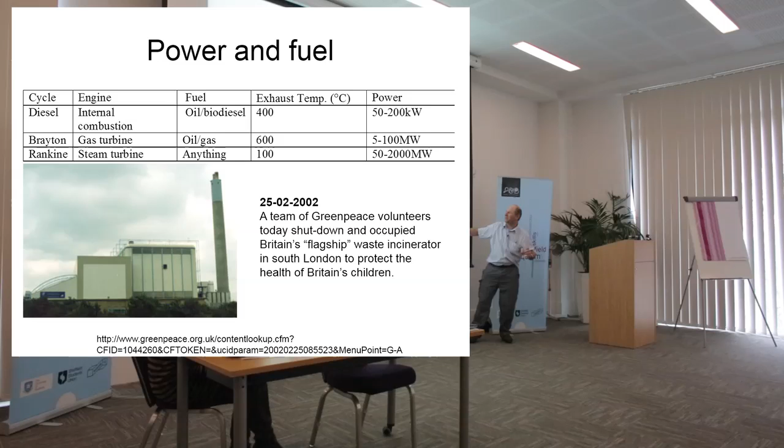However, there are some idiots out there. This is an old one, I'll admit, but a group of Greenpeace volunteers shut down a flagship waste incineration plant in South London to protect the health of Britain's children. First of all, I presume most of the children are alive. Secondly, this was a combined heat and power system, which was probably the most effective use of burning anything, particularly if they're burning waste, in this country.

So think about what people are doing. I see my time's come to an end, I've got a few more slides but I shall stop there. Think about what the energy means, don't just rely on what people tell you. Remember, you can do calculations, and like what Richard was asking about the cost of fuel going up, remember we do have to go through a process of starting off buying things to keep businesses going. We need early adopters, but don't just leap onto something for the sake of doing it, and think about what your actions are. If you're going to try to shut something down, there are much better things to shut down. I shall finish there and answer any questions, which I'm sure you've got.